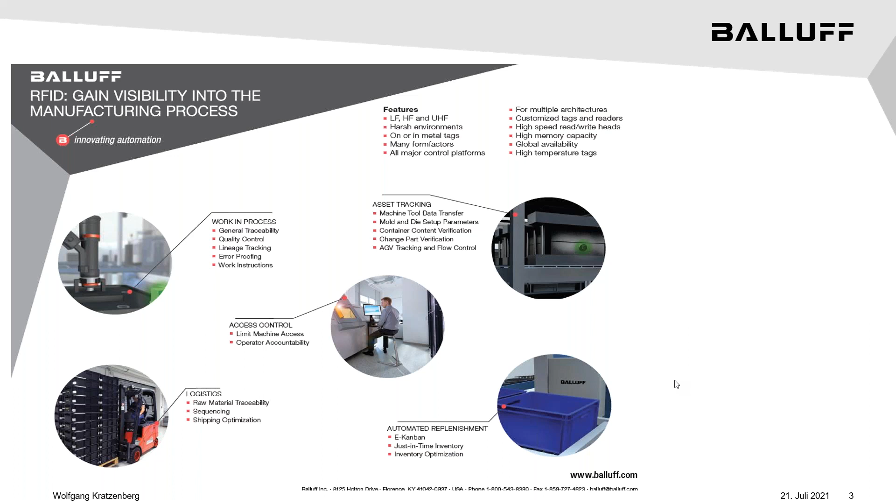So the areas of a plant, and all the different applications we face, and there's plenty more areas than this, but these are the common areas that we address with RFID.

So in plastics, think about molding. How do we track those molds? A lot of these molds look the exact same. How do we track the molds when they go to the tool room? How do we make sure when we put a mold in a machine that it's the correct mold for the product we're getting ready to make? In the machining world, how do we make sure we have the right tool for the right job? Metal forming, how do we make sure we have the right die in the right press for the right product being made? And how do I find that die when I'm getting ready to make a specific product? I go into the tool room and everything looks the same to an operator. How do I make sure? RFID plays a role in that as well.

And I'll call out the tool room specifically. It's just tracking those individual tools from the time they come into the plant to the time they go out of the plant. We can track usage information. If you think about what RFID really is, it's a chip with a piece of memory on it. You can write data to it, and I can read it without touching it. Not to oversimplify it, but really that's what it is. So I can use that fundamental premise to identify exactly where in the plant I have my assets, and that's been critical, for sure in the last decade, with RFID in the manufacturing plant.

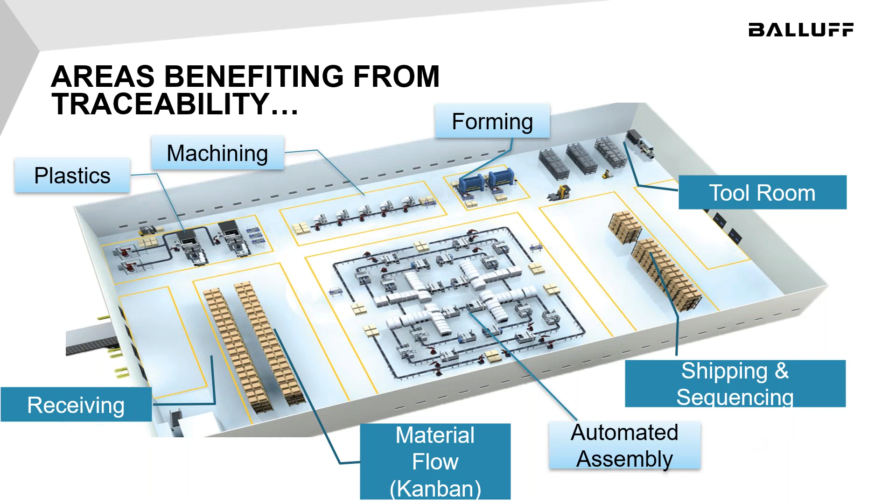So there's a ton of different ways to address these applications with RFID and barcode for that matter. Today I'm going to talk more specifically about RFID, but there's a ton of different systems we have that can address a lot of different applications, and it's all about your application. So someone may call and say, hey, give me an idea of what you guys have for RFID. We have just an RFID catalog that's probably 2 inches thick if you printed it out. But we do LF, meaning low frequency, we do high frequency, and we do UHF. So if RFID can be used to address the application, more than likely we can do it.

So starting on the left-hand side here, this is just a multi-channel processor. This can actually do multiple frequencies on one processor. So essentially, there's one processor, and you can have all 3 frequencies, LF, HF, and UHF, going into one processor. So you're like, well, what would that be good for? In a case where you may be doing some machining and then also transporting, you have a machining center, it goes into the machining center, comes out, and transfers somewhere else. You may be using one frequency while it's inside the CNC, and then as it's being transported down the line, you may be using another frequency for that.

Just a standard 2-channel system as well, still one of our legacy systems. It's been around, this one right here, for a really long time. IO Link RFID as well. So IO Link and this processor, what we call a master block.

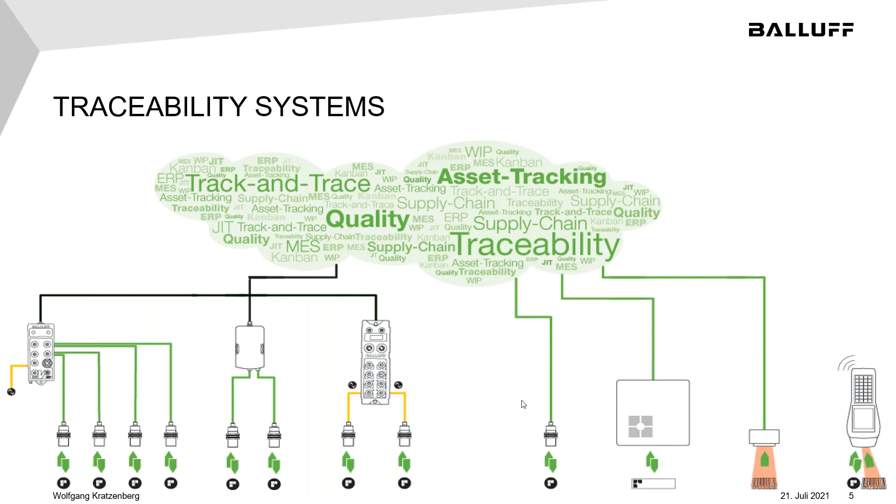And the last two on here are barcode, both fixed and mobile barcode readers, and mobile RFID readers as well. But again, I'm going to focus more on RFID here today.

So asset tracking, I mentioned this one specifically because everybody has plant-based assets. Machine tools, for example, and this is just a good example.

This tag here that's in the side of this tool holder is about the size of a Tylenol. Very small, it's 10 millimeters in diameter, about 6 millimeters thick, and it goes into the side of the tool holder. Information is written to that tag, all the offset data that happens at the presetter, and then you transfer the tool to the actual machine. And instead of having a clipboard with a bunch of offset information written on there from the measurements you just took, you read the tag, it automatically transfers it into the CNC machine and updates that register in there.

So now you know how much life you have on the tool, how much usage is left on the tool, which tool pocket does it go into when it's finished, what's the diameter of the tool, what's the length of the tool. Essentially, this prevents crashes and tells me where to find the tool when I need it.

Huge application, and this is where we originated. This is where Balluff RFID originated over 40 years ago, was in this specific application, and we've expanded since.

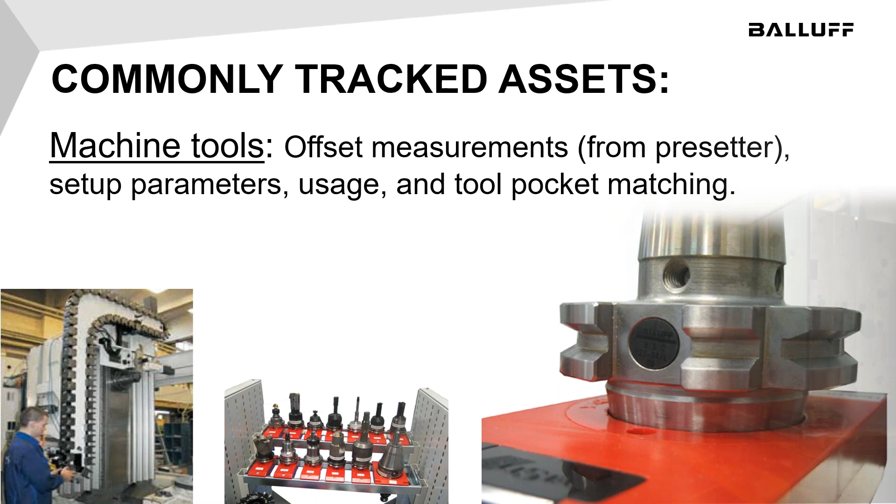So molds and dies, I mentioned this one is, of course, the setup parameters as well, is when you're getting ready to stamp parts or mold parts, we can count shots, we can count hits, how much usage. Again, if a mold is only rated for 20,000 hits, how do I manage that?

Do I just count that with a mechanical counter? How many hits weren't really hits in that? And am I paying more for refurbishment than I have to because I'm not doing an accurate hit count or an accurate shot count? Just a quick example of how that works.

And again, both molds and dies are essentially just tools, and that's the way you have to think of it. Very much the same way as change parts would be.

Some of these change parts that are required to change out, format change on a production line for packaging, for example, they look identical. Putting RFID tags on them and then putting a reader below them will confirm that an operator, in fact, has put the correct one in there.

So customers in the past have used inductive proxies to say, okay, yeah, there's a part here. That's fine in some cases, to know that a change part is in place. But how do we identify exactly which change part is in place? That's the key. So the difference between RFID and a prox sensor, for example, is a prox sensor can say, hey, somebody came in the door.

RFID can say someone came in the door, here's their name, date, and their license number, for example.

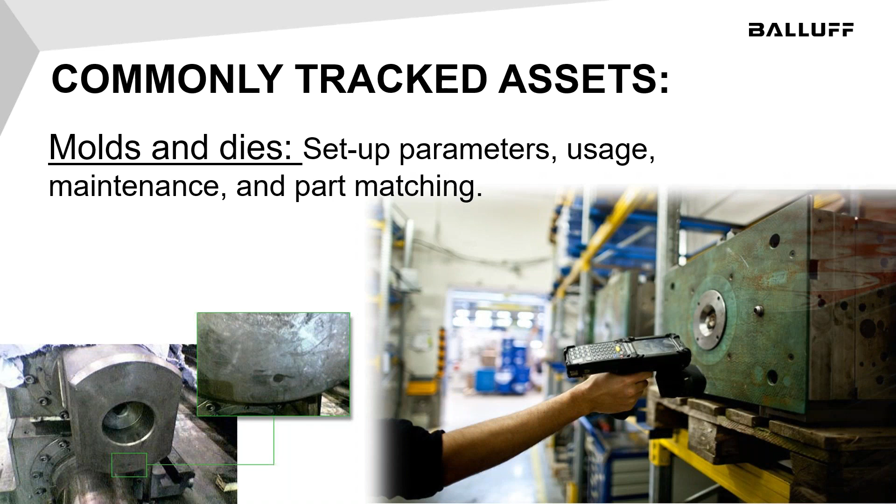Commonly tracked assets - this really comes down to, this is probably the most commonly tracked asset around a plant - the actual containers themselves. So I mentioned raw materials, and I keep mentioning that a lot, but especially in food and beverage, and really in the life science world, is how long did a bin stay outside of a refrigerated area?

Or how long was something in an explosion zone in a plant, or how do I keep a specific bin outside of an explosion zone in a plant. Being able to track that bin is really what it comes down to fundamentally. It's about putting a tag on the bin, and like the one on the right, these things with the red top are batteries, and they had barcodes on them. So as the operator was loading the bin, they were reading the barcodes with a handheld reader, and that information would be automatically written to the RFID tag here on the corner. So instead of doing the inventory by reading every single barcode, the operator can come up and read the tag, and it'll tell them the exact contents of that container, because as it was being loaded, it was automatically written to that tag.

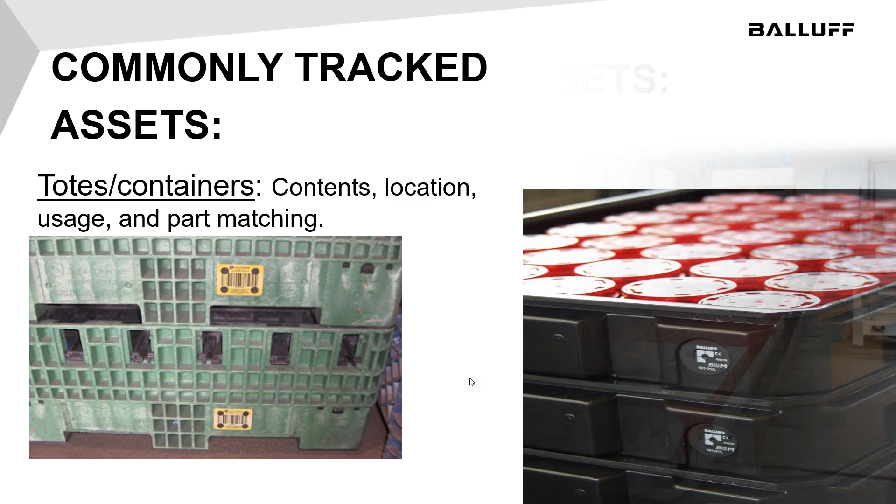So AGVs, and I mentioned this one earlier as well. Basically what we're doing is putting a tag in the floor. Sometimes they're burying the tag in the floor - they'll take the concrete out, place a tag in there, concrete over top of it, so plant workers can't even see that there's a tag in the floor. And then there's an actual reader on the AGV to tell location. You can identify flow control, the usage, and of course when it needs to be maintained.

Everything in the plant has to be maintained. So you talk about predictive or preventative maintenance - this is an application using RFID that is critical, because how do I log all that information? Some people are still doing it on a clipboard and paper, but this is rapidly moving to using RFID in this case.

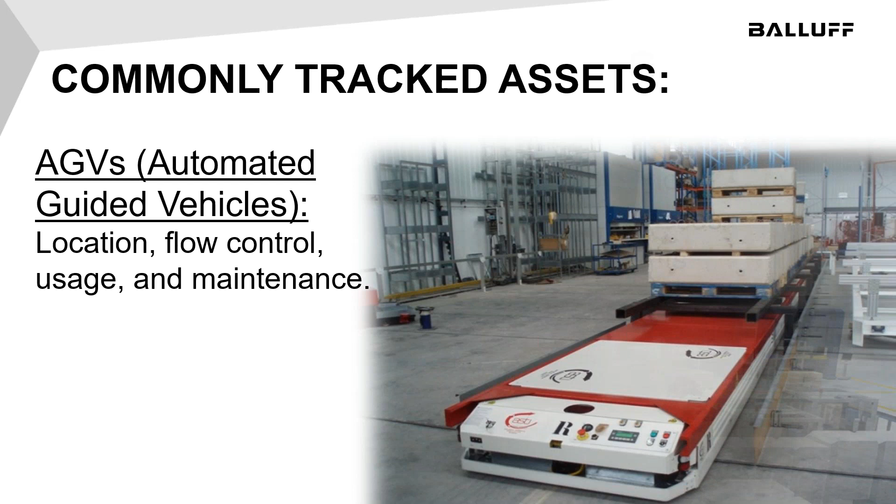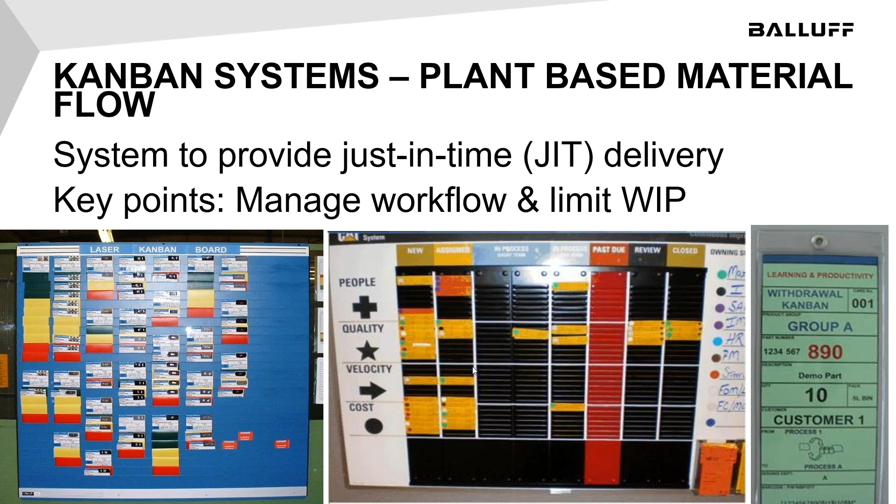Well, you can imagine these cards can get lost or misplaced. The information can be smudged off of them - somebody has oil on their hands, you smudge the ink off really easily. We essentially have eliminated the need for that entire board. We put an RFID tag on the side of the bin, and as that bin rolls down in there, it says, okay, we have a bin in play, it's a full bin. When that bin is pulled out of that roll rack and put into the return roll rack, there's a signal sent that says, okay, we have an empty bin on station 2. We need to replenish station 2 with number 5 machine bolts, whatever material needs to be replenished there. So it's about sending that automated signal.

There's no need for cards. There's no need for other than to have, in some cases, an AGV that does the running of the material from the central warehouse back to the production line. And I use that term central warehouse to identify exactly where all the raw material is being held.

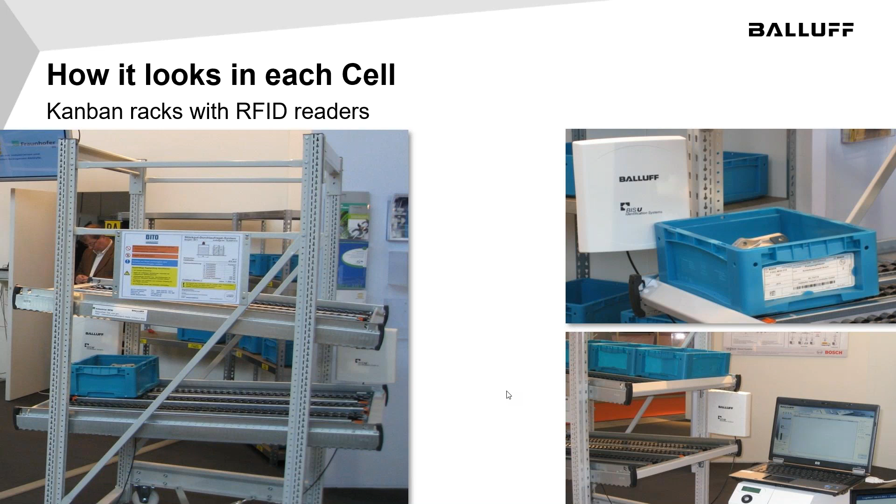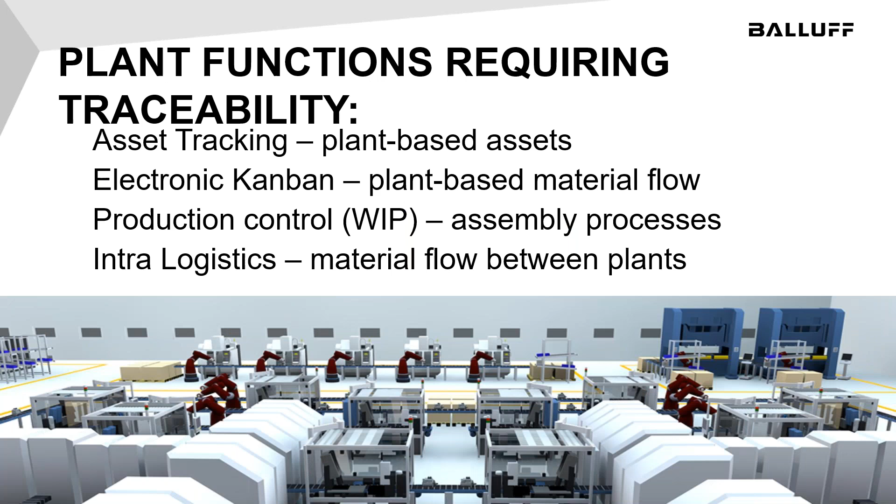So very common is eKanban, or automated replenishment in that world. Work in process - this is truly, if you make something, everybody has this application within their plant. The question is, with RFID, what kind of data is being written to the tag? I hear this over and over again from newcomers to the RFID world. Essentially, there are 3 kinds of data we've summed it up with: it's either build data, process data, or lineage data. That's the kind of data being written to the tag along the process.

And the build data is essentially: what are we trying to build? Think about flexible manufacturing - we can start off with just an empty pallet, but before it gets to station 1, you write right on that tag exactly what it's destined to be. That way, every station it goes into - you may have an operator, a manned station - and that operator has to do a task based on what that product is going to be. So if it's building bicycles or something, they need to use a specific bolt for a specific color frame. They've got to know what it is that's going to be built. Process data is how well do we build it.

So if you think about the old-fashioned station 1 to station 50 concept I've mentioned before, at every station something happens. Well, did it happen correctly? That's the key. A lot of times what we'll do involves vision as well, as far as machine vision and inspection cameras.

They'll use an inspection camera between a critical station. So let's say there's a critical process at station 10, and that process happens. There's an inspection camera right after it comes out of that station to say go or no-go. Is everything seated correctly? Is an O-ring out of place or something like that?

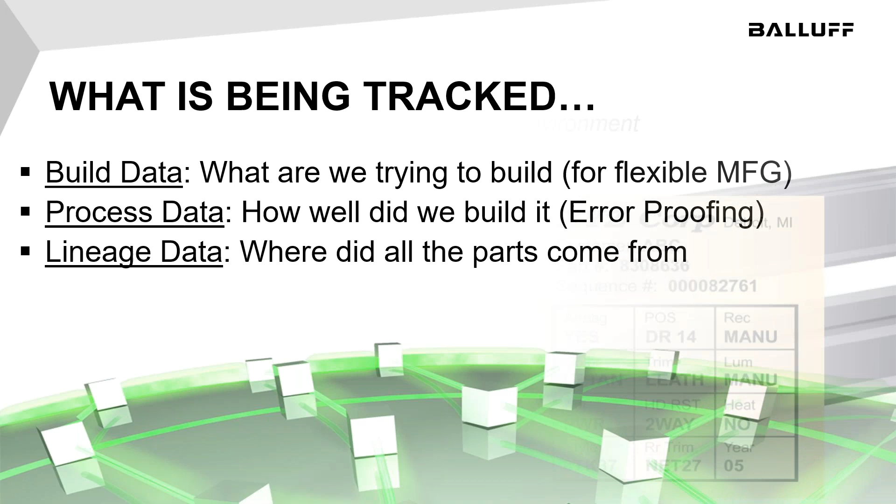So lots of different applications, and this goes into the details of manufacturing of seats, for example automotive seats. Lots of different combinations of possibilities is what this ends up being. And really, that's what flexible manufacturing is. The days of manufacturing one product on every single line are over. It's usually multiple products on one line, and you have to retool those lines.

So for flexible manufacturing, how do I help operators differentiate between a tan seat or a beige seat or a light tan seat? RFID can help identify exactly the facts of what is actually to be built.

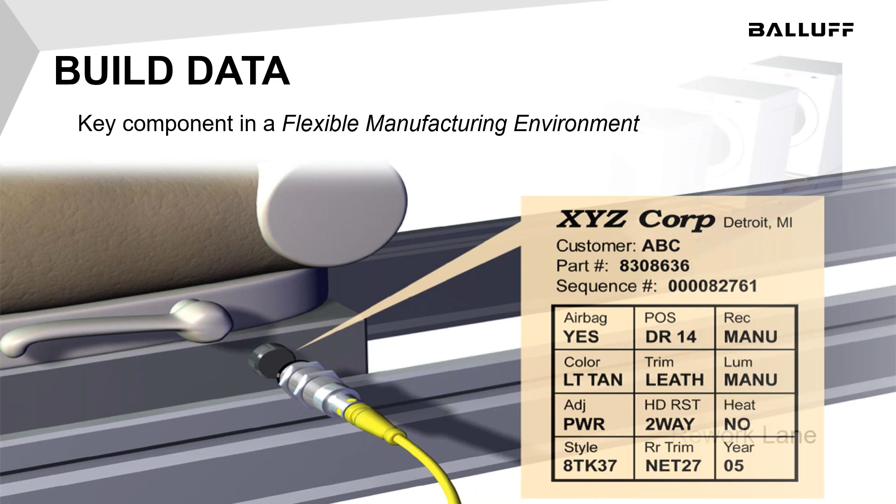And then process data - this is what I mentioned earlier: when there's a problem, it's time to kick it off the line immediately. You don't want to add value to something all the way down the line, and then it's essentially destined for scrap or rework. Let's get it off the line immediately.

It gives an indicator light to the operator to say, hey, we're kicking the part off the line, something's in rework, and then send that over to rework. They take care of it and put it right back on the production line, and it goes through the next station it's supposed to go into, as opposed to waiting all the way to the end of the process and having scrap or rework.

And then lineage data, I mentioned this earlier - it's about tracing all the components back to their source. A big part of this is for liability claims, regulatory compliance, government regulatory compliance, and recall information, as I went into detail earlier. Again, it's about narrowing it down to a specific lot number, a specific range of lot numbers. That way I'm not doing a complete broad level recall and recalling parts that may not even be affected. So RFID can help with that.

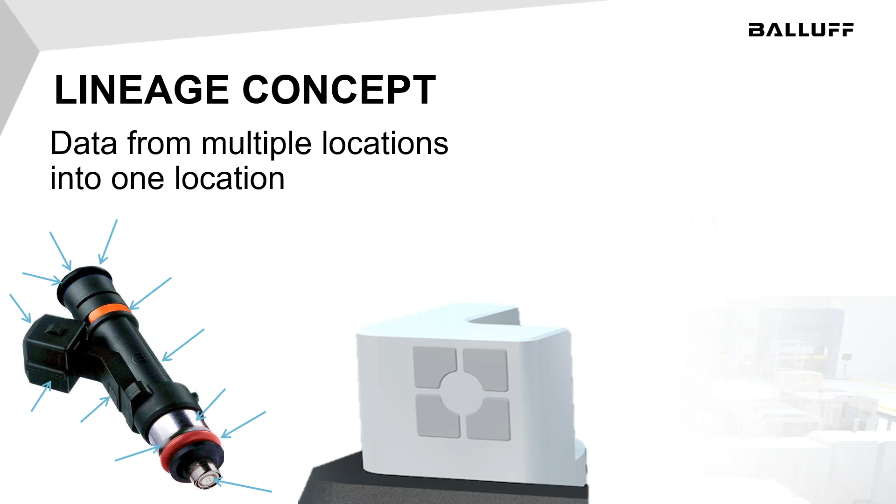When I talk about logistics, usually the primary system we're talking about is UHF because it has longer range. As a rule of thumb, the higher the frequency in RFID, usually the longer the read range, though it depends on the size of the antenna and things like that. UHF is the one that's actually being used the most for logistics applications, to do automatic reads as something's being loaded onto or unloaded from a truck. Getting that longer read range helps automate it, because now I don't have to have an operator walk up and scan something really close.

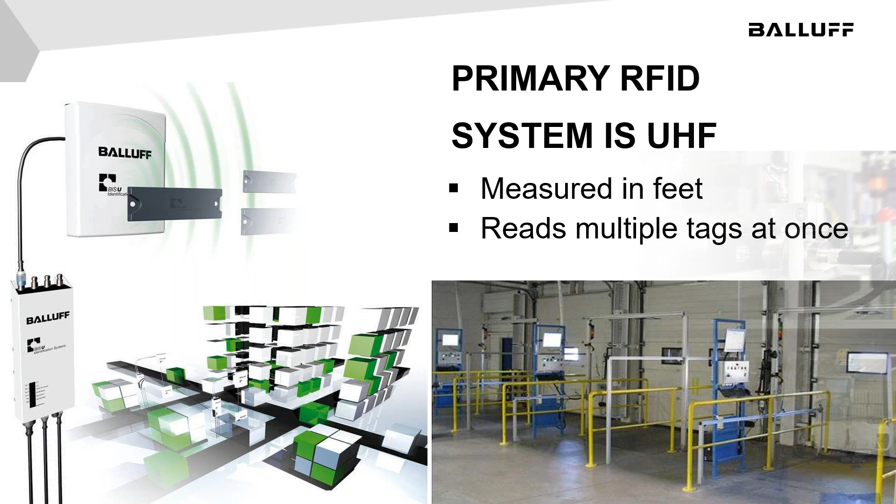So automation in the RFID world means doing it with a fixed reader. That way I don't have to have an operator pull a trigger or initiate that read some way or another. But that's still an option, and in some cases having that mobility for an operator is very important.

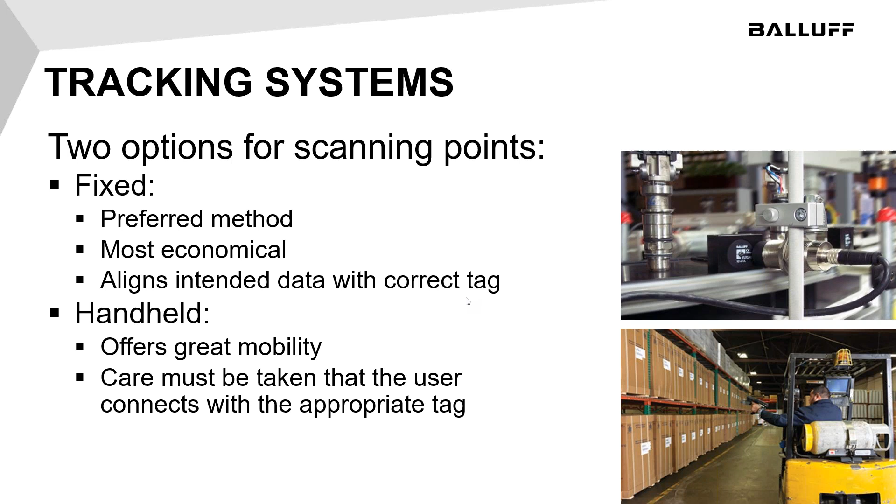So it may be kind of a quasi-automated system. In a case where they're using a handheld, they can use that long-range handheld, pull the trigger, read multiple tags, and then identify exactly down to that specific tag what they were looking for. Sometimes handheld readers provide a good segue from what I'd consider a full manual process to a really automated process. Automation usually is a fixed RFID reader, where I don't have to wait for somebody to initiate it by hitting a button on a PC or a PLC - that read takes place automatically. So there's two different ways to do it, and Balluff has both fixed and handheld readers.

This reiterates the concept of being able to read things offline. That's where handheld readers come in as well. If you have a fixed reader on the production line and you have to pull a part off for rework, how do I read that when it's offline? In the past, we'd have to pull a reader off the line, and it's still tethered to a cable. So our customers requested mobile readers, and we responded with mobile readers that also have software on them. So again, handheld readers sometimes provide that segue or evolution from a true manual application to a quasi-automated process.

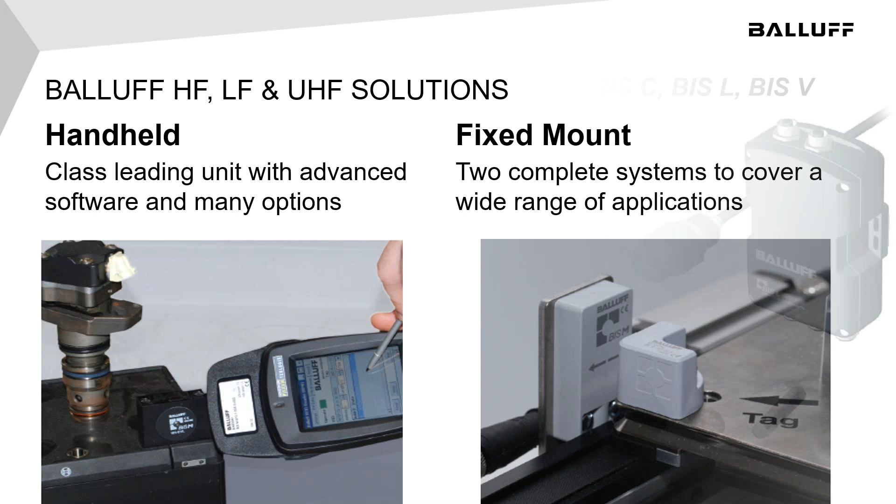So again, we do LF, HF, and UHF at Balluff - lots of different ways to address an application, and yes, there are benefits of one over the other, and we can help with that. The key is identifying the attributes of a system, what makes the difference - what's the difference between using 125 kilohertz or 13.56, et cetera. There are benefits of each. Low frequency, for example, has the best tolerance around metal, and just about every plant out there has a lot of metal around. HF has tolerance too, but LF has a little better tolerance and a little shorter read range. So there's give and take between each frequency, but that's the key. One of our biggest advantages in the industry is having all three frequencies, and all the different form factors, tag sizes and shapes, and different ways to get that read.

That's the key, and rarely do we have a hardware conversation - I'd say never in the first conversation. We're talking about your application first. Then in the second conversation, we may start to say, well, since you want something more than a 3-foot read range, we're probably going to go with UHF.

So the key there is, you think about the concept of a hammer - I use this with our sales guys a lot. There's lots of different hammers out there made for different things, right? There's roofing hammers, there's sledgehammers, and you wouldn't want to use one for the other. They're both hammers, but you don't want to put your roof on with a sledgehammer, and you don't want to hang a picture with a sledgehammer. A standard hammer will get the job done for roofing or hanging a picture inside your house. So again, it's a tool for every job.

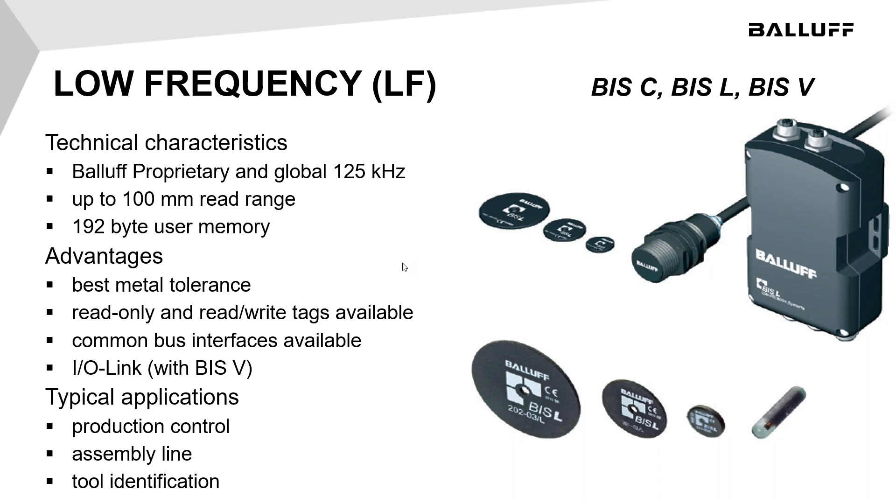And then high frequency as well - again, a very broad portfolio. I mentioned the BISV, this processor that'll do multiple frequencies into one processor. This is our longer range HF. We do both global frequencies, which is very important. This frequency can be used all around the globe.

One of the differences between HF and UHF technology is that UHF has to be used within the region. The UHF frequency is managed by the FCC, so we have to operate at a certain frequency here, and there's a different frequency in Europe, a different frequency in Asia, for example, for UHF. For HF, it's a global frequency. So if you're a global company shipping a machine out with RFID on it, if you're using UHF, you'd equip your machine with the frequency for where it's going.

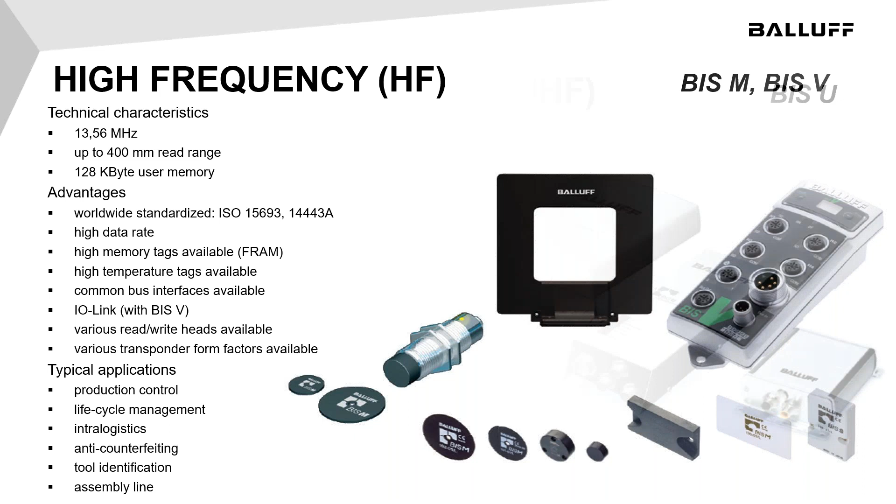With HF, it doesn't matter where it's going, it's the same frequency across the globe. So again, UHF has the longer read range, but there's a standard that exists, much like the ISO standards for HF, just that it's regional specific - that's the key.

And again, all of our frequencies, whether it be LF, HF, or UHF, we speak Ethernet IP, Profinet, Profibus - all the major control platforms, CC Link, EtherCAT, etc. In addition to TCP IP, meaning I can connect to a PC or a server, as well as RS-232 serial, and in some cases USB as well.

So I mentioned this earlier - how do you decide what system is best for your application, or what do we use to decide that? The benefit is knowing your environment, which means it's very important that you get your rep from JH Foster on site and get your Balluff rep on site as well, so they can identify in the environment exactly what we need to overcome to maximize or optimize the reading of the RFID tag. And that's the key - environment is the number one driver to select the system.

Next is how much data and how fast - meaning you might have a super fast production line. How much data is being written and read, and then how fast is the pallet, or whatever the tag is on, could be the raw part itself - how fast is that moving? That's the key, and this is a big advantage for Balluff in the RFID world as well. We specialize in reading a whole lot of data really quickly.

And again, the required read-write distance will tell you which frequency you're going to get down to. If it's pretty much anything over 2 feet, you're going to go with UHF - that's the driver for that frequency choice.

Tag and reader form factor, because of space limitations - again, we're not trying to wedge a technology into a space, and sometimes physically you don't want to put a tag into a place that it just doesn't fit. We probably have a tag for no matter how small that space is. We actually have a tag as small as 3.5 millimeters that can be put on a part and buried into the side of the metal, flush mount on metal, and still be able to get that read. So a lot of different ways to get a read on a tag.

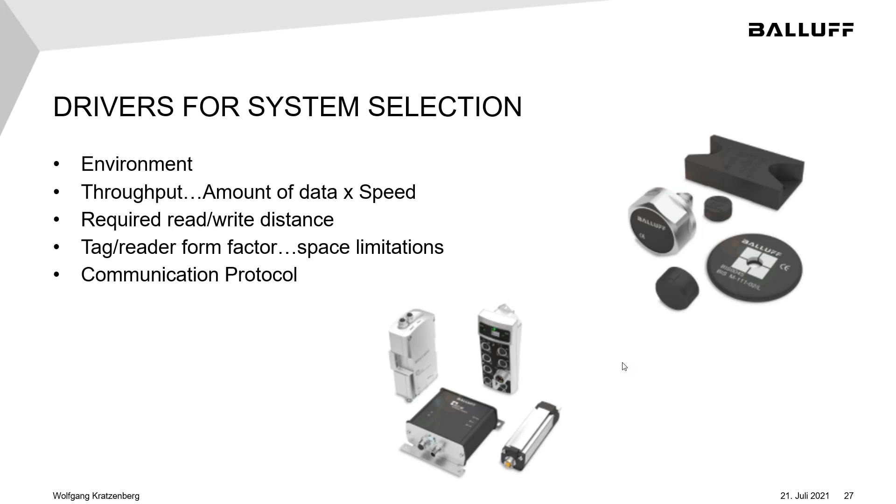And then of course, communication protocol, which I've mentioned multiple times here. We have all the major control platforms in addition to Ethernet, TCP IP, RS-232 serial, and USB. So these three systems are what I call the three pillars of RFID, because I'd say probably 60% of our applications are addressed by these three systems.

Again, I don't want to go too much into the hardware here, because it really depends on your application as to what would be used. But let's just start with IO Link, for example - this is just the low data requirements.

If I'm not going to write any more than about 96 bytes of data, and a byte in the RFID world is essentially one character, a letter, number, or special character on your keyboard, so I have 96 characters. Once I need more than that, I probably want to move up to the BIS V system, and then the rest of our systems as well.

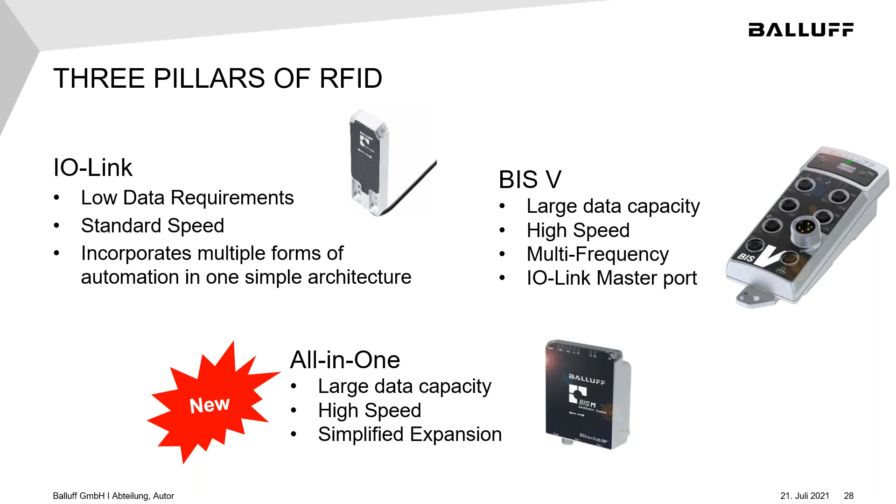The all-in-one system is also very good at being able to read a lot of data really fast. So with IO-Link, one of the advantages is that I can mix the environment with other automation technology.

You don't have multiple networks to manage, so it simplifies the control platform and really simplifies the cabling, as you can imagine here. You can have all these devices into one block, and then you have one run going back to a switch, or even all the way back to the control cabinet, but it really eliminates that big rainbow spaghetti you used to see in control cabinets.

So again, IO-Link really is about having that mixed environment. If you have RFID and you have sensors that you're getting ready to deploy, you can have those all on this one processor and all on the production line, so it's all speaking one language back to the PLC or PC.

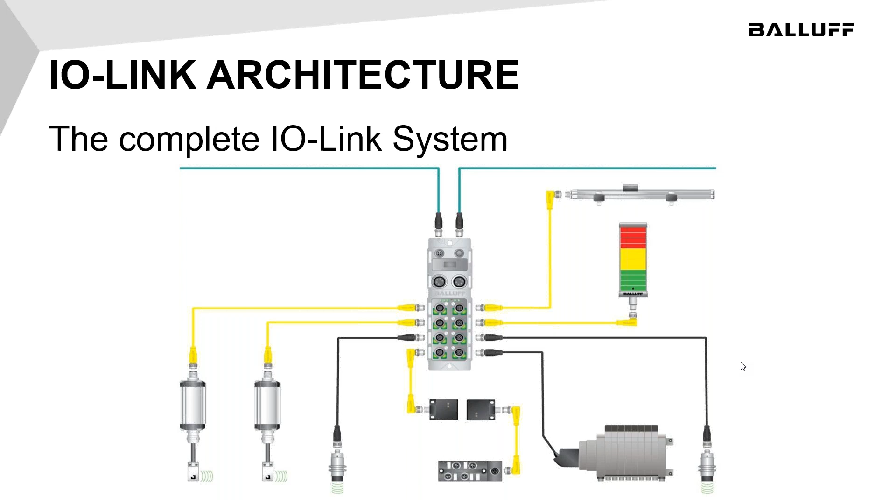The IO-Link advantage for Balluff is that we've been doing it longer than anybody else. We were talking about IO-Link before it was even cool. IO-Link is not a Balluff-specific technology, it's a global consortium, everybody can do it. Probably in the last few years, everybody has started to do it, and yes, the products work interchangeably.

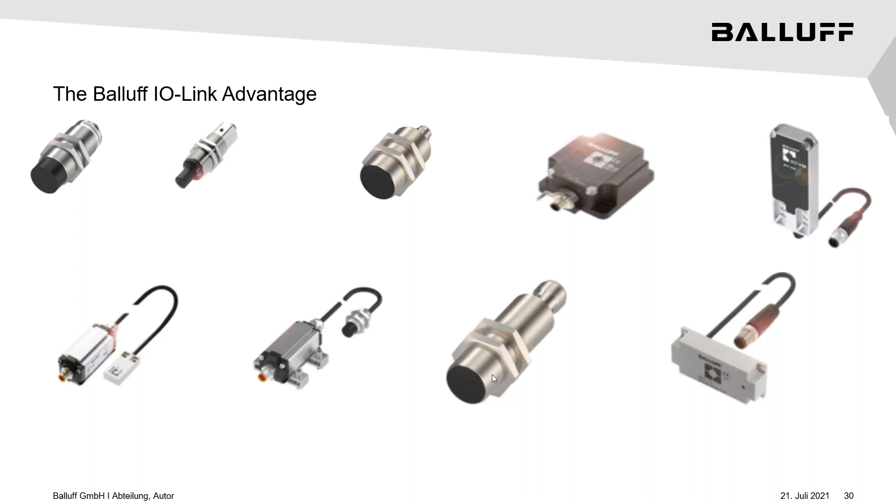So theoretically, you could use a Balluff reader in a competitor's master and vice versa. There's a lot of flexibility within IO-Link, a ton of flexibility. But again, we have the broadest portfolio from a form factor standpoint on these RFID heads. And then the BIS V, again, this is about the higher memory and faster read rates, etc.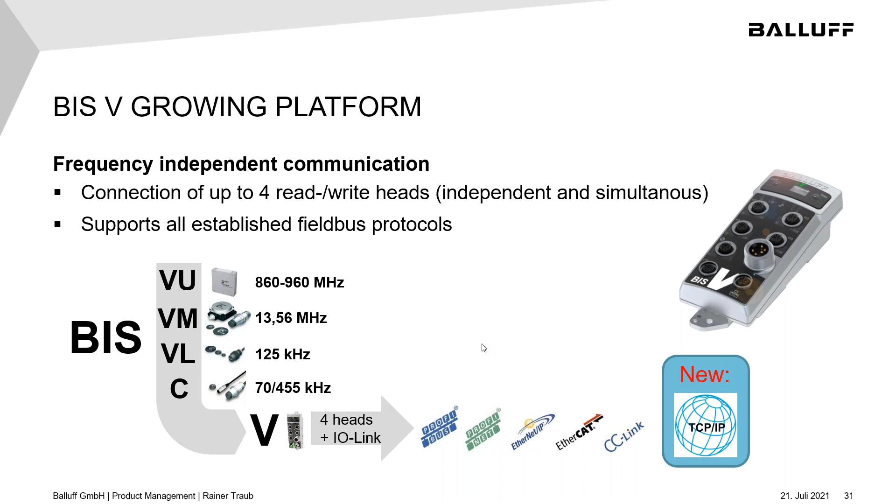So again, all of our major frequencies go into one processor. And again, the all-in-one reader - the system setup and wiring is where this one really differentiates itself from everything that's in the market. So it's a point-to-point reader.

There are 3 connectors on the bottom of this reader: one is network in, one is network out, and one is power. So you go directly to it. Think of a case of what we'd call islands of automation, for example - you may want to start with just one reader. Well, then how do you expand from one reader to multiple readers?

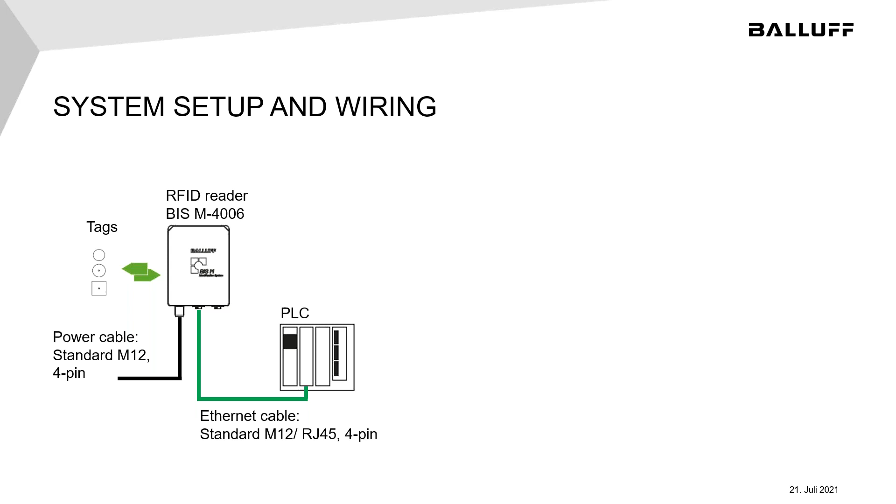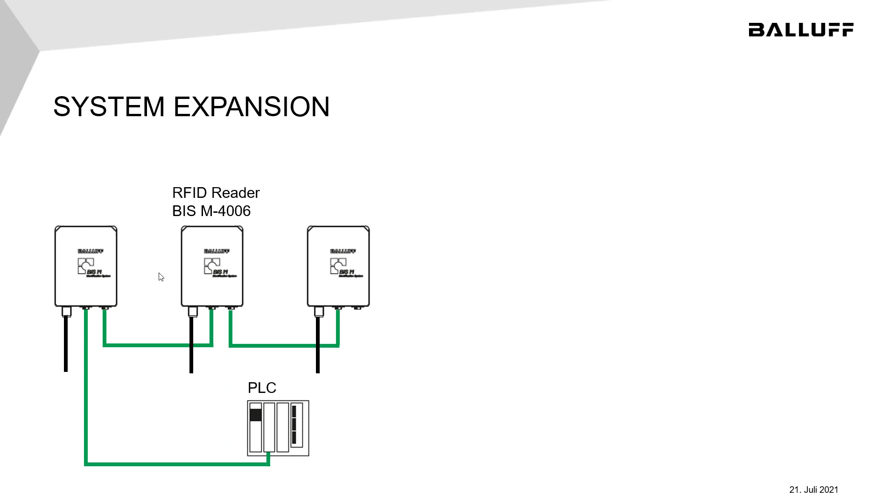There you go - it's just very simple daisy chaining technology all the way down the production line. You drop power out of each one of them, you put an Ethernet cable from one to the other. This is available currently in EtherNet/IP and Profinet, but again, one connection back to the PLC allows you to have multiple heads out on the production line.

So why Balluff RFID? We've been doing this for a long time, and we've been doing it in the industrial space. That's the key. There's a lot of players in the RFID world out there, and there's a lot of players trying to get into the manufacturing space. This is our core competency, in the industrial manufacturing space.

We are an end-to-end solution provider. We do hardware and software integration, data handling, cloud services. We can connect to the cloud, and we can handle the data from the device to the cloud.

We're the market leader in IO-Link RFID, with the largest portfolio of hardware in that world - the largest variety of form factors, which is critical, especially for machine builders who are building small machines. We have a lot of those readers that fit into tight places that nobody else has.

We have the best support chain in the market, and the guys at J.H. Foster here really represent that for us as well, as that's your first line of support from beginning to end, from pre-sales to post-sales.

So those guys have access to the highest level of support within Balluff. In addition to the guys at JH Foster, you have your local rep, which is Christian. That's a Balluff guy, he can come in.